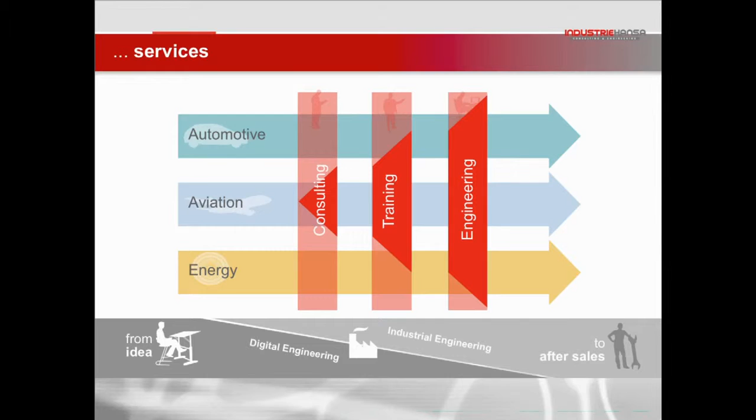IndustrieHansa is a big German company focusing mainly on engineering services across the automotive, aviation, energy, and so on. What's important is they've got some customers — they've existed for almost 25 years, so there's a lot of relationships already. There's something to start with as a basement. What's more important, there are almost 2,000 employees right now, all engineers.

That's an important part, because in that environment I was asked to build the styling and design department — that means creative people, artists, left brains versus right brains. So what we have here at IndustrieHansa, which didn't have any of these services in their portfolio before — it wasn't known for these services on the market, although we had something like 80 people working in the technical surfacing department, which is somehow related to the design and styling departments as well.

So how do you introduce a brand new team to a market that's really picky? How do you do it without going through individual portfolios and listing the whole team as a set of individuals? No, it doesn't work like that. So we wanted something that would put everything under one roof and introduce the team itself. We found the best way to do it is to introduce the skills and the mindset inside the studio through the process, through the story of how we actually create things.

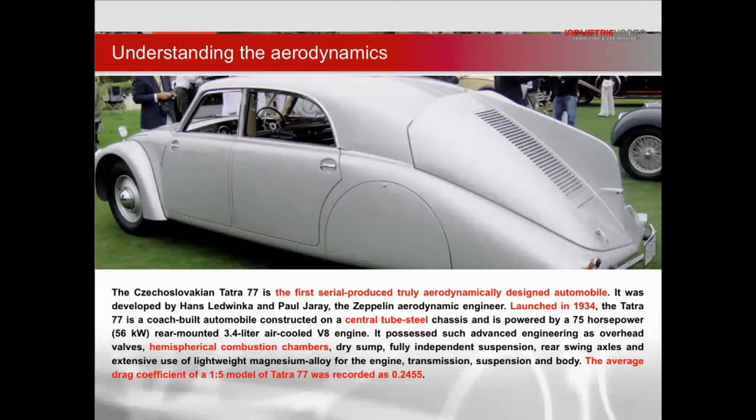So we went through this little car - that's the first one, the Tatra 77. It's the first serial-produced, truly aerodynamic car. This is the drag coefficient - only a few cars right now have that coefficient. It was 1934.

By the way, something for my American friends - it's got a Hemi, 8-cylinder. So this was one of the first truly aerodynamic cars mass produced.

Really interesting, really cool car, a lot of technological parts - and then I'm just losing my ability to speak English. Sorry, I'm not American, not English, you can hear that. I'm here for two weeks and I'm slowly losing my ability to speak English. So the technology was really advanced.

By the way, there are two important names here: Paul Jaray, the Zeppelin engineer, and Hans Ledwinka, the famous Porsche and Beetle designer, engineer. So this car was built and designed in Czech Republic, Czechoslovakia, in 1934. That's a brilliant heritage - by the way, Jay Leno has one of those cars in his garage as well.

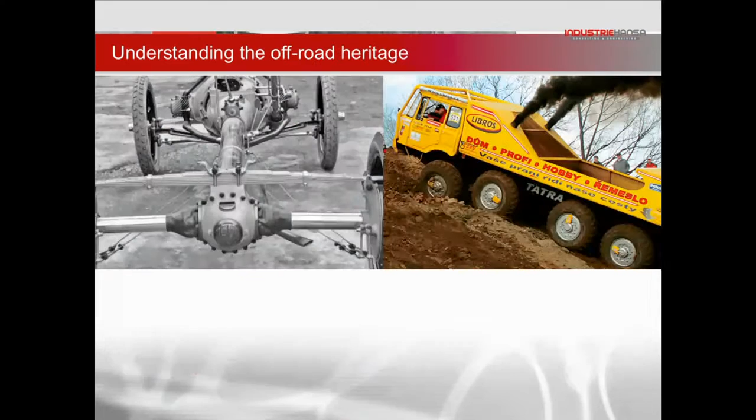What else? We have that tube frame, the central backbone spine of the whole car, that allows it to move over difficult terrain like the example on the other side. Interestingly, even the car I was showing before is based on this tubular frame. So it combined off-road abilities with the phenomenal efficiency based on the aerodynamic solution - so we have that off-road heritage, and that was one bit unfamous.

From the 50s, 60s, and 70s, those were the cars used by secret police in the former communist bloc. So whenever you saw that car on the road, parking in front of your house, you knew you were in deep trouble. But it was the synonym of luxury in those days. It still is, by the way.

If we have time later on, I can show you a brilliant movie of how they drive it over the mountains. In one day they're changing from snow to mud, fantastic, brilliant. Oh, it's on YouTube as well.

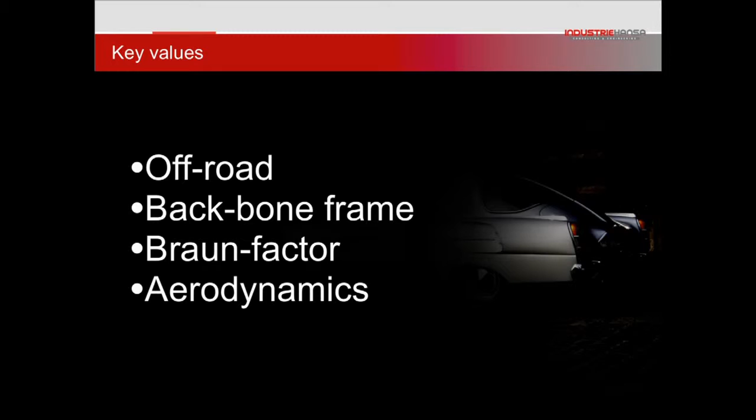So this is the part everyone likes. I was attending one of the classes yesterday, called Rockets, Robots, and Cars. Fantastic show, fantastic presentation. I love how this designer was using real elements and putting them in a different context, painting over.

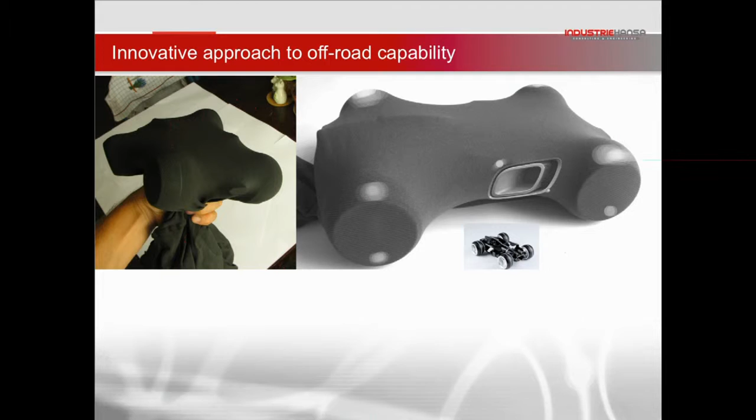And that's exactly what we're doing as well. This is Daniel Simon's Tron vehicle, and one of my designers has just stolen one of the shirts of her wife and wrapped it over. We find interesting forms combined with off-road functionality. So in one image, one little example, we've got a combination of the aerodynamic shape and the off-road capability. I like that.

We started sketching. This is something we always enjoy. We were playing with a lot of ideas. By the way, these sketches on the right side are the iPad sketches. I love the symmetry, I'm using the little Pogo sketch app. Today I just learned that there's a Pogo with pressure sensitivity available — I need to get it.

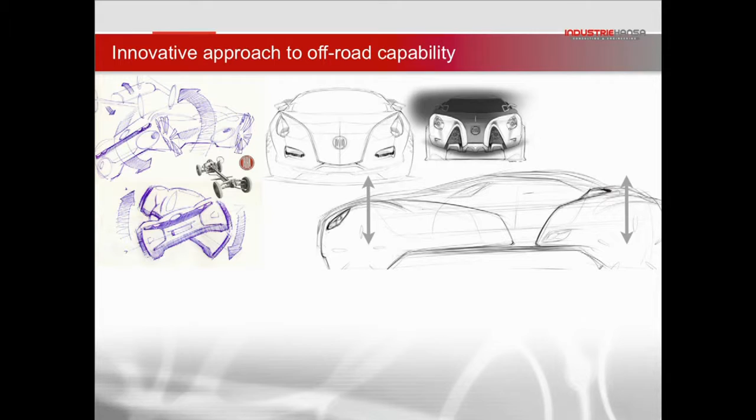Analog stuff, producing hundreds of sketches. I just don't want to spend too much time on it because this is the Autodesk event and we need to focus on digital tools sooner or later.

So we started with some side views. These are really important because they help you set the proportions, and also they help you focus on the goals. And the purity, that Braun factor in the form language, was something I was considering one of the most important things. This is one of the initial sketches one of my designers did.

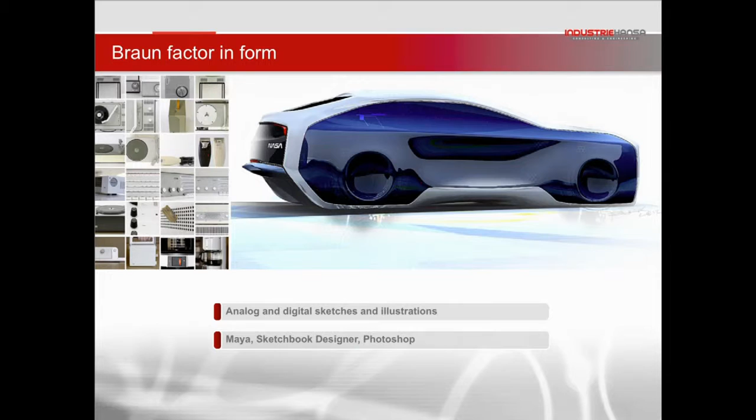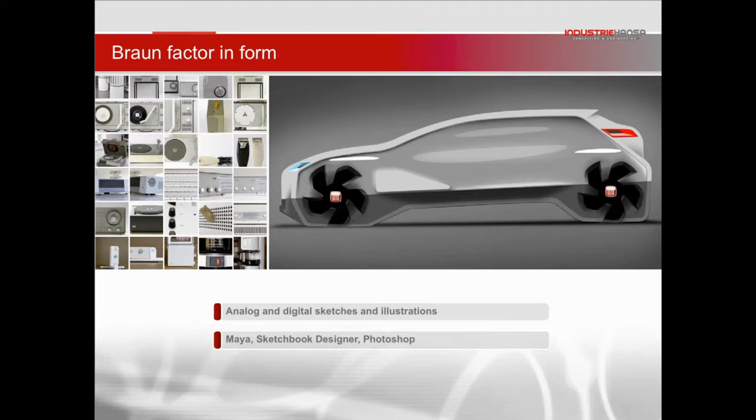There was another one using a little bit more soft forms. As you can see, I was really trying to get my team not to make something too realistic in the beginning, just to have a lot of freedom expressing the form of the car within the SUV type of segment, without worrying about wheels or whatever. Just express it as a sculpture. Express yourself with the sculpture. There's another one, a little bit soft form.

And then we got the third designer in the house. He jumped in after 2 months and brought this idea. Interesting, but where the hell is that Braun factor? Crazy, but there were some ideas he came with that were quite viable, and we worked with them later on. Maya, Sketchbook Designer — all those things we really like to use in those phases.

As well as polygonal modeling - I'm a really big Alias fan, but even working with Alias for maybe the last 15 years, I found the NURBS core really limiting from the start. Because suddenly if you find yourself asking how would I do that with the curves of the surface transition, it limits you.

That's why I really enjoy playing with Maya and 3ds Max in terms of polygonal or subdivision modeling, because that gives you a chance to play with forms and proportions even better than with clay. What's beautiful is you can spit out the STL model and get overnight a quarter scale or small scale model just to judge the proportions, shapes, and volumes.

The beauty of polygon modeling is in its core. You can choose Maya or 3ds Max and you can't go wrong, because the polygonal modeling is the same everywhere. If you feel better with Maya, use Maya. If you like 3ds Max, you'll be able to do exactly the same thing, maybe with one or two mouse clicks more or less. But it's your choice, and that's the beauty - we can use that freedom of tool choice.

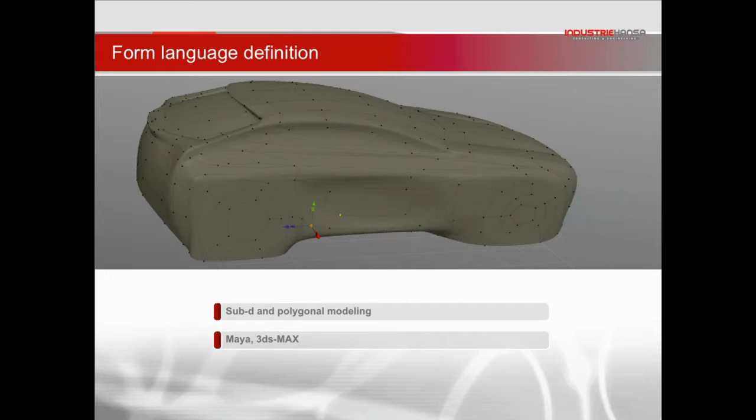Mudbox, very cool stuff in combination with Maya and 3ds Max. Once you start building your models using the subdivision modeling technique, you can easily bring that data into Mudbox, because the topology of the polygons is so simple that you can play with forms like sills and shoulder lines the way you really like, kind of mimicking the analog approach - the same thing you'd do with clay, but in a less expensive way. So this is a really big money saver.

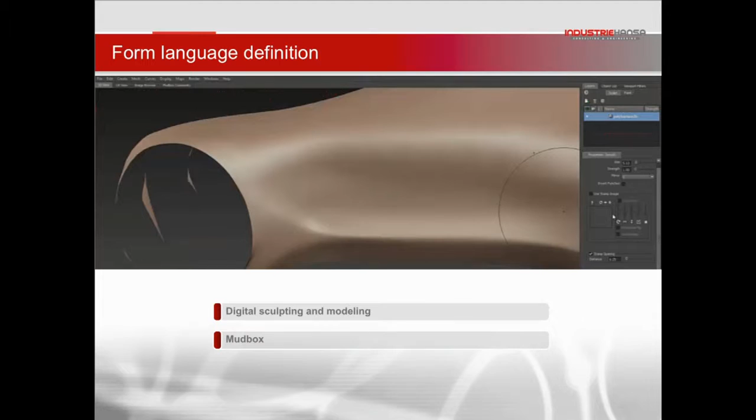All right, Alias again on the scene. I was trying to force the guys to express themselves in the form of 3D tape drawing. Does anyone know what tape drawing is? Yeah, there are a couple of people. Cool. For the others, tape drawing is basically a drawing of a car in 1:1 scale, in most cases using black Scotch tapes put on a white big board with a 100mm grid.

This is the first moment where you can see the real size and real proportions of the car. The human brain really cheats you - when you look at the screen, you will never get the size and proportions of the car right until...

...you put it on the Powerwall or make the tape drawing. On the other side, computers give you the advantage to build a 3D tape drawing, something you can't do on the wall or on paper. By the way, this technique is nothing new, just computers helped us be a little faster. The old Italian masters used something called piano di forma, which was basically a side view, top view, and front view all linked together in 1:1. And this is something you can do in a computer.

So one of my guys, a really good Alias modeler and designer, instantly jumped into Alias to build the model. I forced him to forget about the surfaces - if you want to present me Alias work, don't present the surfaces, I want you to go through a wireframe. And he built that image.

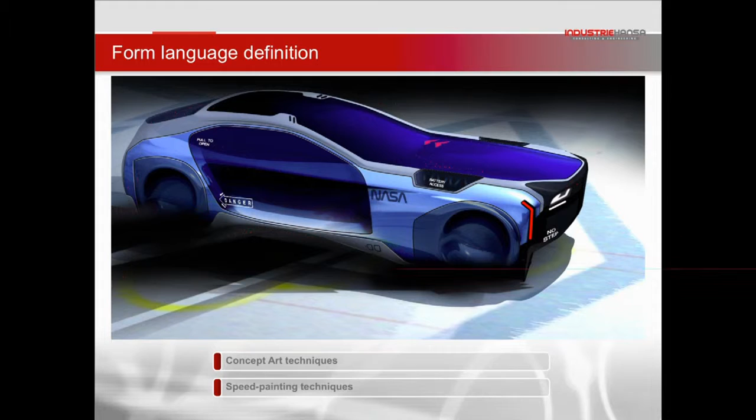Of course, I did that little sketch when the Mars rover Curiosity landed on Mars, and I was so excited that I was putting the NASA logo everywhere. If that happened a couple weeks later, it would be a Red Bull sign and Felix Baumgartner on the door.

Yeah, the other guy in my team is really keen on heavy machinery and trains, so he did this little speed paint. I quite like those things - they're hanging right now in our studio.

Backbone frame. This whole concept, because we wanted to put it in a 21st century context, we decided to use electric engines. We ended up with not 4 engines, but 6 engines. Plus there are 4 hub engines.

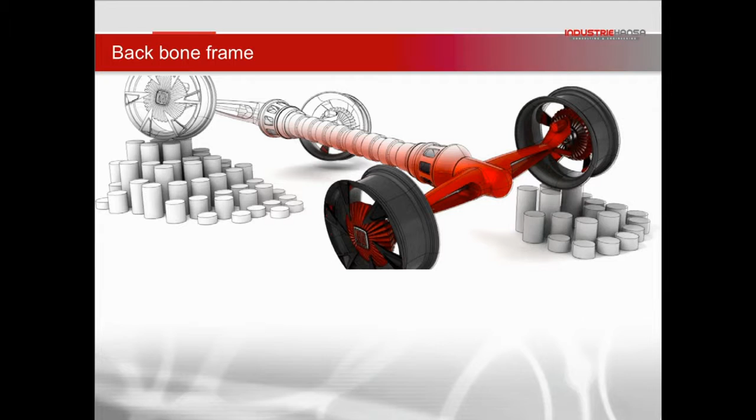Plus those arms are made out of a material called electropolymer, which changes its flexibility with the presence of electric current, so it behaves as a suspension without needing something complex mechanically through the frame. We put that backbone frame into that sculpture just to illustrate how that would work together, and I think it's a pretty appealing image, even without saying it's going to be a car.

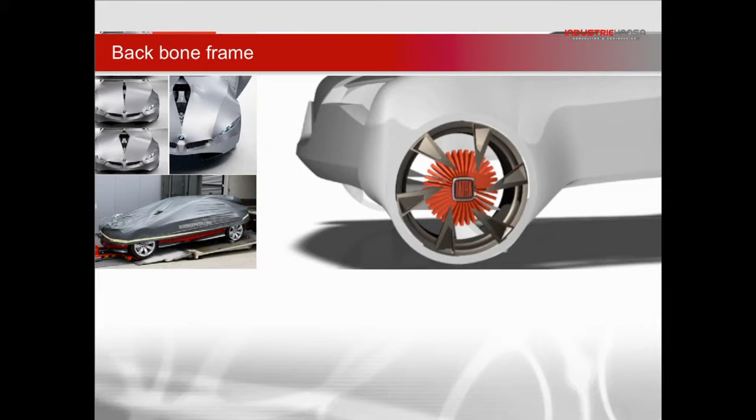When you go to the theater, you wear the long sleeve. If you go off-road, you wrap your sleeve up. That's exactly how that worked. One of the guys did a quick animation in Alias just to illustrate how that could work, because one of the biggest issues with SUV design versus aerodynamics is the large wheel openings, where the wheel travels when the car moves off-road. But on the highway, it catches a lot of air and creates problems in terms of aerodynamics.

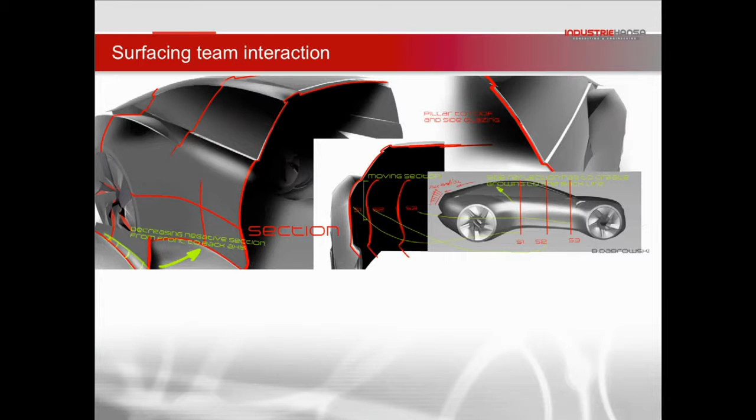A couple more sketches, a couple more side views. Then, based on the Maya models, we started to communicate the idea with the Alias modelers. We got some ICEM guys as well. I just cannot hide that. And that's how we started.

One of my guys got so impressed about this whole project that he did another movie. I'm going to show it in a minute.

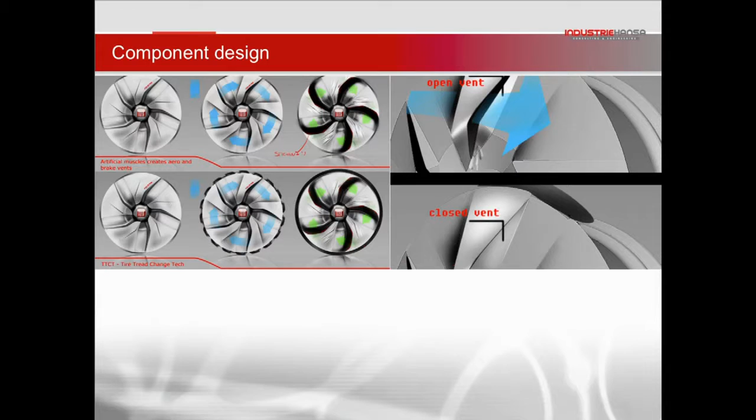I want to spend half a second on the detail of the rims, playing with the idea that ventilation, the cooling of the hub engines, could be restricting the aerodynamic factor as well. So we decided that even the rims will be a dynamic component that changes over speed and over the momentary situation, like a city versus highway mode. There are little vents that open when you don't need the aerodynamic restrictions, in order to cool down the engines.

It's quite nice how those designers' ideas, those creative designers, those artists, are influencing the engineering. We had a couple of engineers helping us implement those things, just so it wasn't only science fiction, and they were pretty excited about it. So we might get some of those things implemented in production quite early. There was another movie that one of my designers did.

The beauty of those images is that it doesn't take too long to do that.

Dramatic. I've said that the beauty of this movie making is that you get your Mac, you get your PC, and there's a movie maker, I don't know what the names are, with predefined templates. You just throw in the images, a couple of animations, it adds the music automatically, it guides you through the story, gives you a chance to put the titles where they should be, and suddenly you're doing the Hollywood stuff. I love that.

So that is the project I wanted to show you. This project was mostly a marketing project to illustrate, to sell the idea of the brand new design department. We set up a Facebook page called Concept Hansa, where you can see further development.

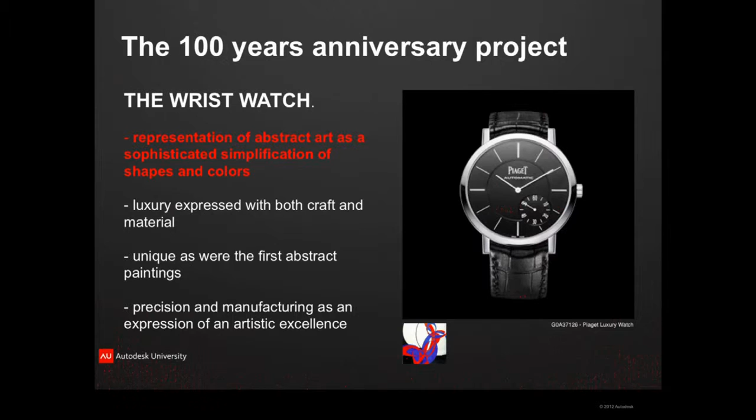There's of course a certain luxury associated with wristwatches generally. I don't like that skull in the middle, but as an example of craft, this is phenomenal. The treatment of the materials is just amazing.

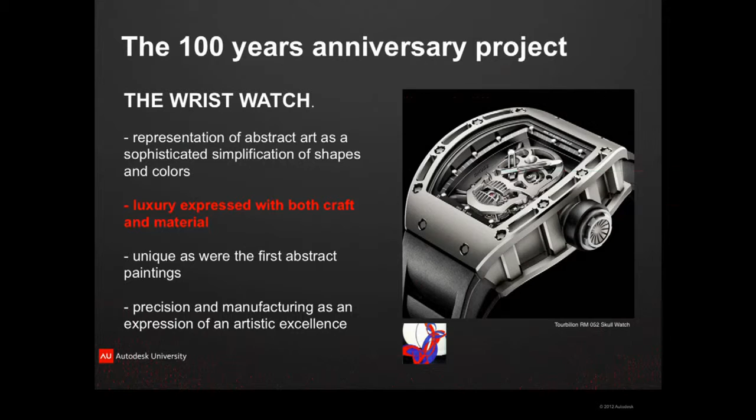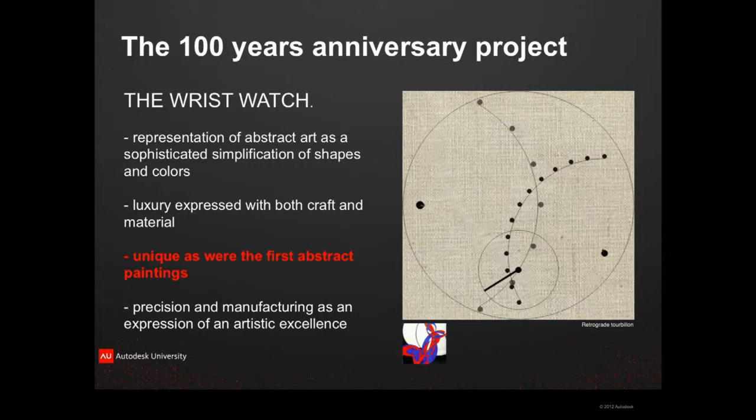We were quite lucky that those watchmakers had built a unique tourbillon which doesn't have a central axis for the hands, but actually has three separate axes. That gives you a different movement of those arms. I'm going to speak about it a little bit later. So that was a really unique possibility to interpret that old painting in the form of a product. And of course, the tourbillon itself is a state of the art combination of beautiful engineering and art.

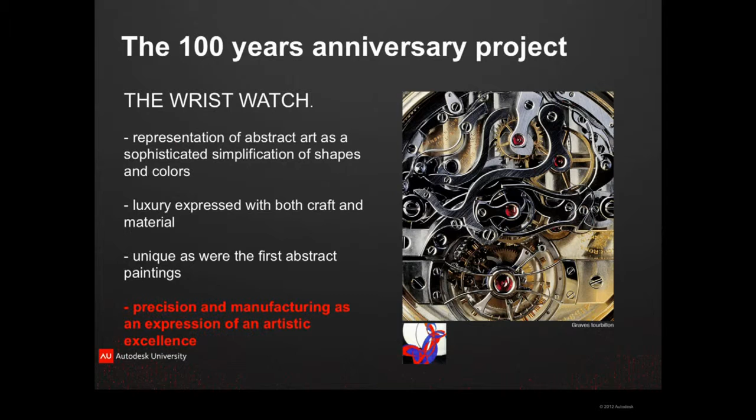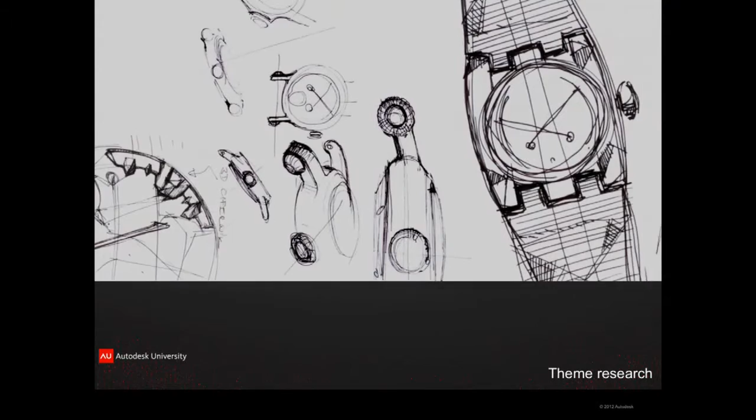So what we did, we started to do some sketching. It was a very limited team, basically myself doing the concept research and theme definition, and one designer/alias modeler who was producing a lot of models later, because communication with the manufacturer wasn't that easy. What I want to speak about is how we went through the whole process, starting with sketching something really abstract, just trying to interpret this whole theme in a way of decoration, which was not the right approach. I was trying to play with the arms, with the hands themselves, displaying how they're different from normal wristwatches, but it wasn't working.

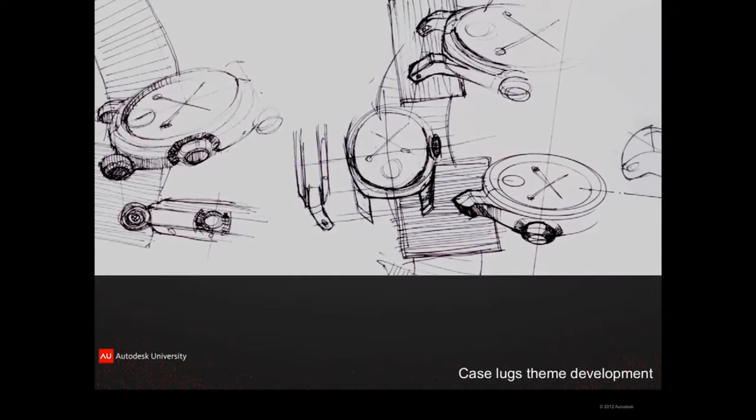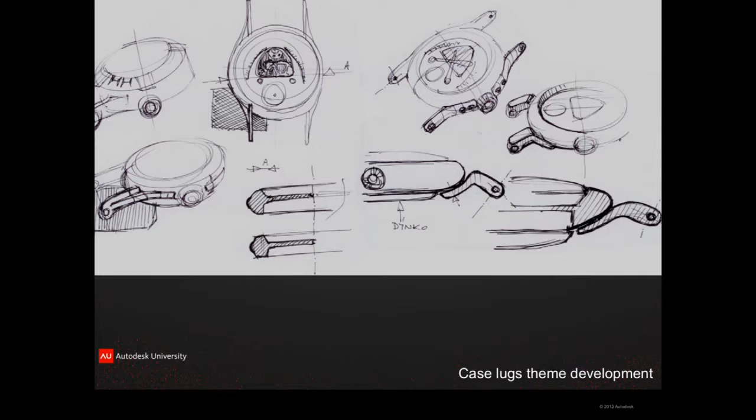The more we were thinking about the whole thing - by the way, most of the sketches were done directly when communicating with the watchmakers, one-to-one meetings and sketching all the time - we found out that the case lugs are probably one of the most important parts of the whole design. We were looking for a way to differentiate from the rest of the market, and we found that not having those case lugs as part of the body, as part of the case, is probably the only way to draw the attention of the potential buyer or watch lover to that watch. That could make them unique.

There were a couple of ideas we were playing with.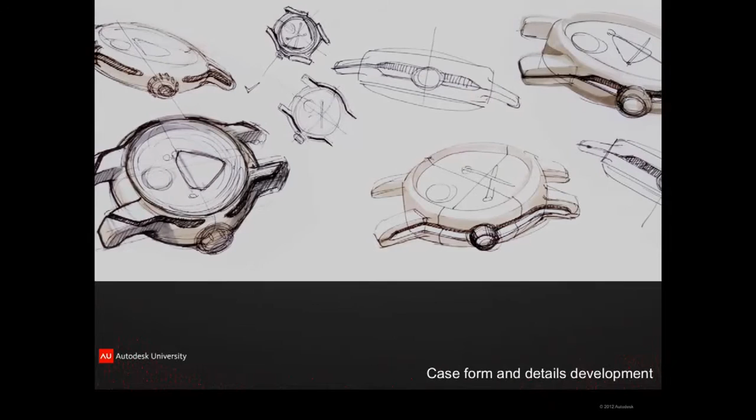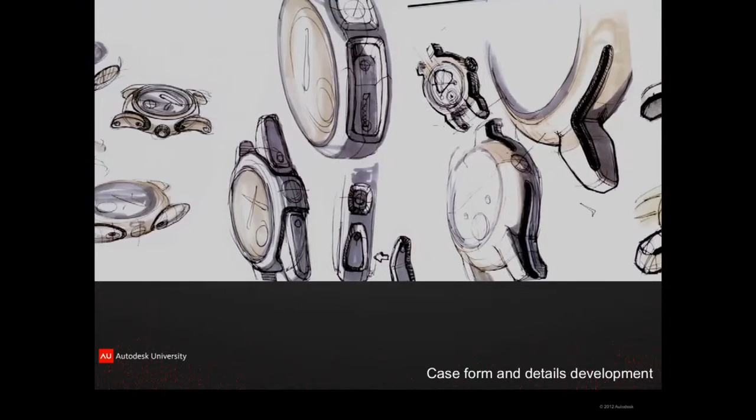We're playing also with the idea of some decorations, grooves, cuts going through the body, but we have discarded them because that would be against the simplification of the forms, one of the key attributes we have set as goals in the initial phase of the project.

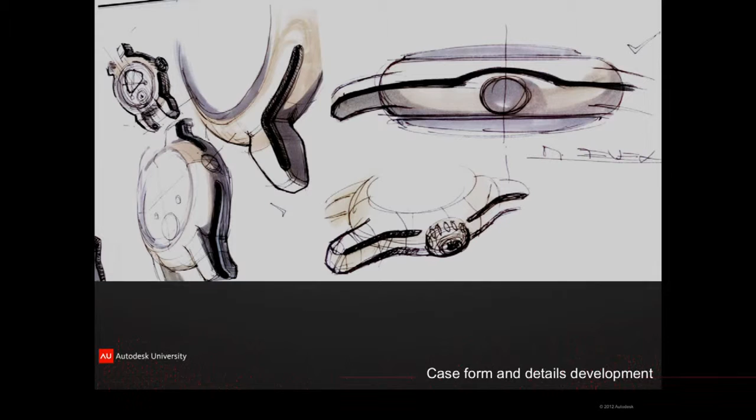But then I did this little sketch on the top right, and the watchmaker was really impressed about the simplicity of the shape, a really round shape. This is nothing special about it, but later on you will see how we have translated it in the real product.

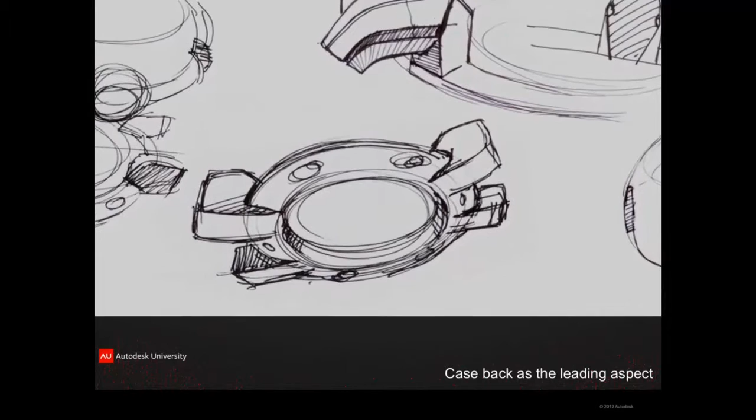So speaking of the case lugs, we decided we will listen to the manufacturing guys, because although we are using some NC machinery, this is white gold, so it's pretty soft. You can't do too much when you mill those pieces. But we decided that we can actually mount the case lugs to the case back in order to separate it visually from the case itself, to create very sharp angles even in the inner radiuses of the case.

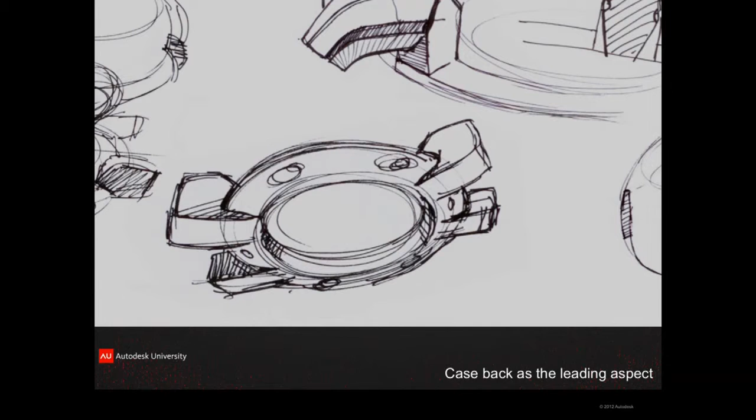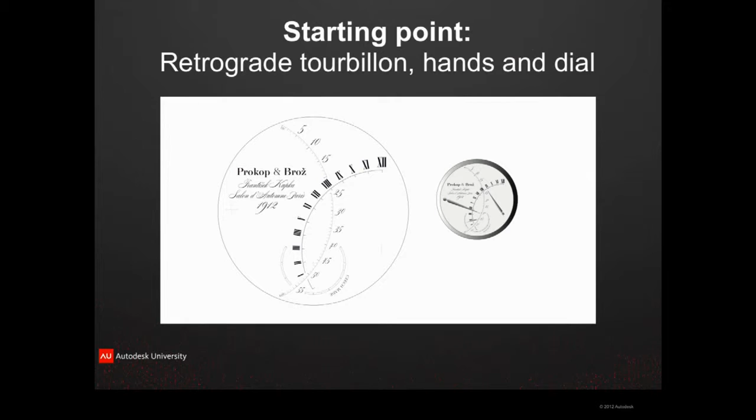This is, by the way, the dial. That's how it looks. I didn't do the dial because the watchmakers have their own graphic designer. I couldn't influence that. To me it's a little bit too Art Deco, but fair enough, that's the way it's done.

So now, Maya again in the game. One afternoon, just quickly forming up basic volumes, putting the texture of the dials, trying to play with the idea of the separated case lugs, and that was the result - quite convincing, photorealistic imagery.

Thank you. I'm just...

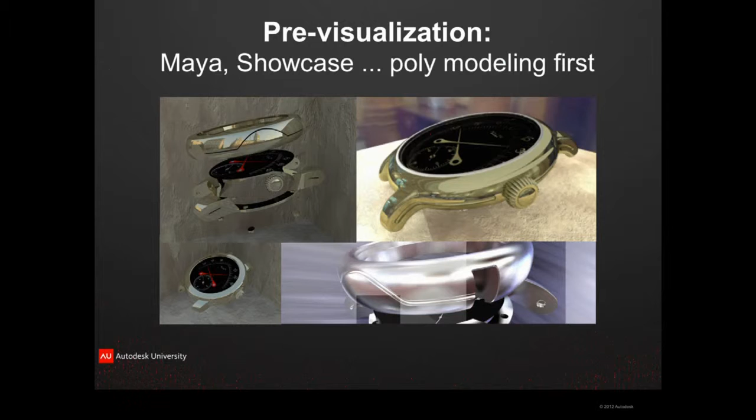So we started with the Maya models pretty quickly just to communicate the idea, but because we had to bring those plans into production as quick as possible, we had to give them some data, and the watchmakers were working with Rhino. Interestingly, the Maya and Alias transition was so seamless.

By the way, I just found out there's a plugin for Alias that exports directly the Rhino data. Just go to the internet, Google it, because it's phenomenal, it's great. It helps very well, no information loss.

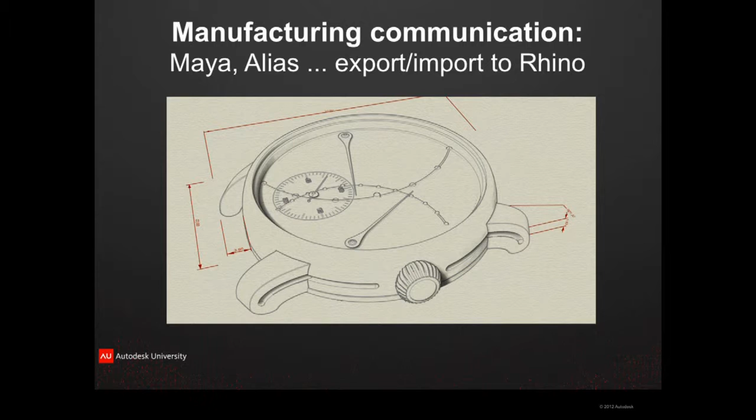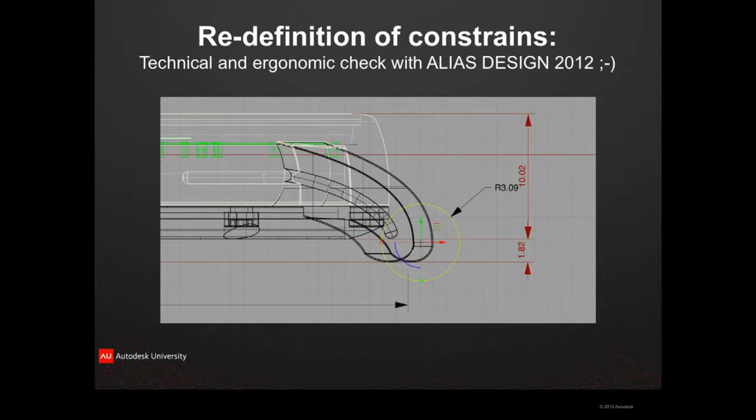I've mentioned earlier, I'm a big lover of Alias. Most of the engineering communication and the manufacturing communication happen at the level of Alias design - the cheapest product from the whole Alias family. Without that, we wouldn't probably be able to go that far within that short time frame.

The communication was really difficult because we had to make sure that the armband - you call it like that? Yeah? How do you call it? Wristband - will fit in between the lugs.

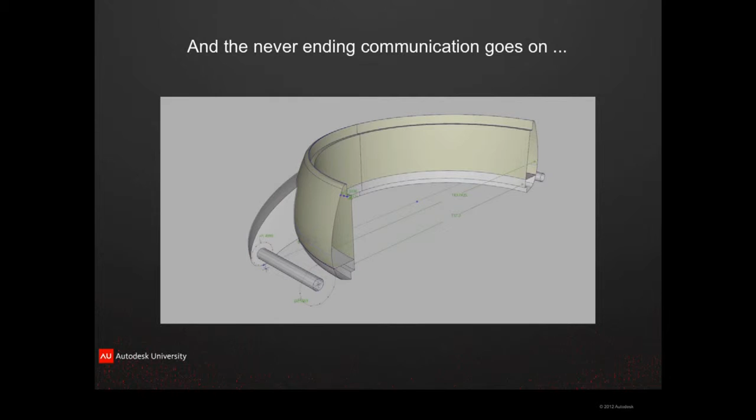We will have enough space to wrap the leather around it, because even the wristband will be handmade. So we had to make sure there will be enough material around the glass, around the lenses here, because there will be a minimalistic sealing around it. And remember, this is going to be white gold, so there's just 1 millimeter thickness at the peak of that case - quite challenging technologically.

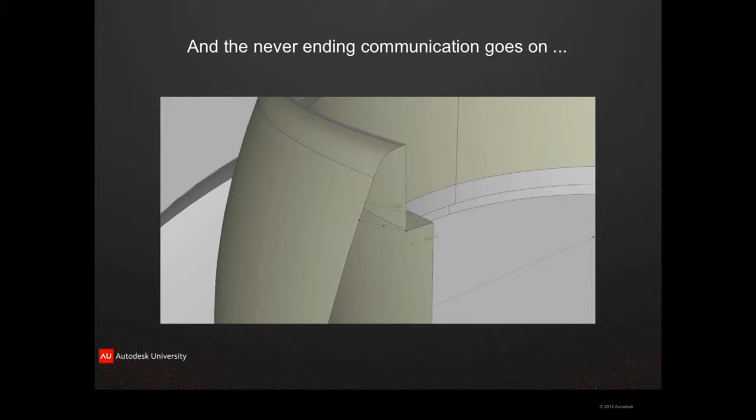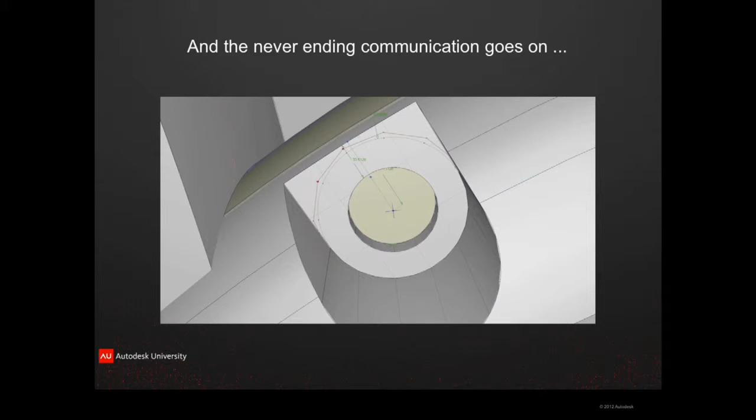Again, the same situation about the wristband. The little holes for the screws down there - I wasn't happy, but there was a request. Instead of drilling the holes and creating an elliptical hole, they preferred a milled out hole, coming with the tool from the side and removing the material, getting a kind of rectangular part outside of the case back. I don't like it, but we have changed it, by the way.

So this is one of the initial concepts. We gave up in the end the groove, the cut, because we found out that the case itself is so minimalistic and so pure in its form that it brings that required value of luxury and a premium feel. As you can see on those case lugs, we got a really sharp corner, and this is something we wouldn't be able to produce, and no one would be able to produce, if you kept the case lugs coming straight out of the main body of the wristwatch.

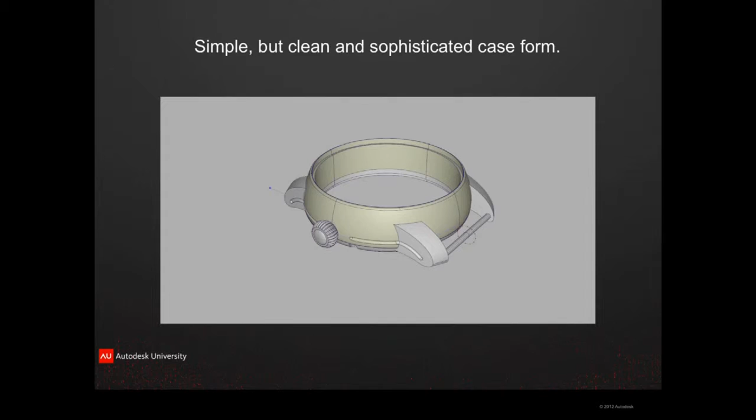A few more shots - that's the case back, how it will look manufactured. And these are the final visualizations. So what is important here?

I cannot show you the final stuff because this is going to be released in 2 days. I didn't have approval for that. But it will be released in 2 days, and there will be some kind of marketing event happening around it, so I'm pretty sure you won't miss it wherever in the world you are.

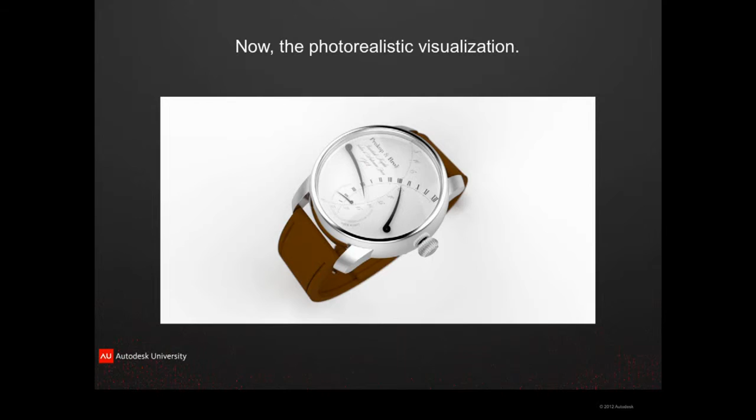I'm pretty proud of that, because although there will be only 10 pieces, this whole project laid the foundation for a more massive series of products for the future. The philosophy that came from the manufacturing initially influenced the styling solution. The case lugs mounted to the case back became a key attribute of the whole new production line of wristwatches, which is pretty unique.

Again, quite innovative. I'm going to finish with this: 30th of November 2012, 10 pieces, $50,000. Unfortunately, all sold, if you're interested.

What? No. You know what? I love wristwatches. I've got a couple of the wristwatches I have designed myself, but none of them goes, it's not even far from that level. Just remember the first slide I gave about myself, the billionaire? It's one of the items which is not true.

All right, the last example. I think I just don't want to... it's like 15 minutes, it's perfect timing. Unlimited creativity, I like this one. I'll go quickly through those things because this should be a kind of cherry on the cake and should make you laugh.

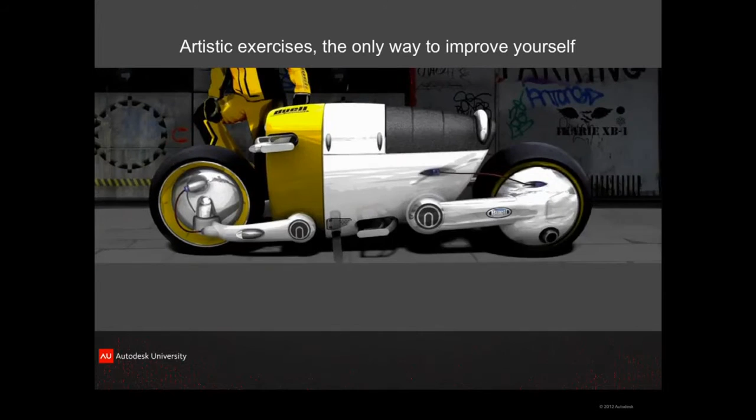This is something I really love to do, and most of you who know my work are not surprised that I'm showing this again. I'm also doing this stuff. A couple of people asked me if I'm going to give away a calendar again this year. No, I don't have any more calendars, sorry, I was working as a director this year. But you probably know some of those images. Specifically this one, which made me proud yesterday during the keynote - 9,000 people have seen my image.

Cool. But I did this one as well - it was kind of two guys racing something like I would call a redneck Segway.

A friend of mine used to be a designer at Mercedes; right now he's one of the chief designers at Volkswagen in Germany, in Wolfsburg. He was like, 'Hey Mike, this is like all your science fiction stuff - you don't need to build it, you just can play in it.' You know that, the rednecks? You won't do that. I will. So I did - that was my reaction.

But of course I'm not a mechanical engineer, I'm an artist. So I got some wise people around me and asked them for advice. My father, 40 years in the industry, his reaction...

A friend and colleague of mine from the UK said, 'You've got too much free time.' One of my friends from our motocross gang was like, 'Why would you do that? No one else is doing that.' Why - they are pretty down to earth people. And I love the last one - I've got a friend who's really in a top management position, that's his quote.

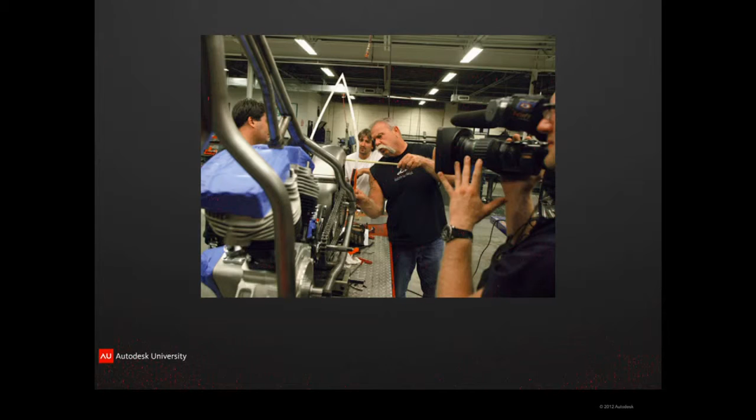All right, but I have to say, I was able to find very good advice. So, thank you, TV. I'm not a big fan of this show, but I love the way they approach building anything - just sharpen your saw, chop it, weld it, and make the bike. So with no engineering, with no CAD data, we started to build something.

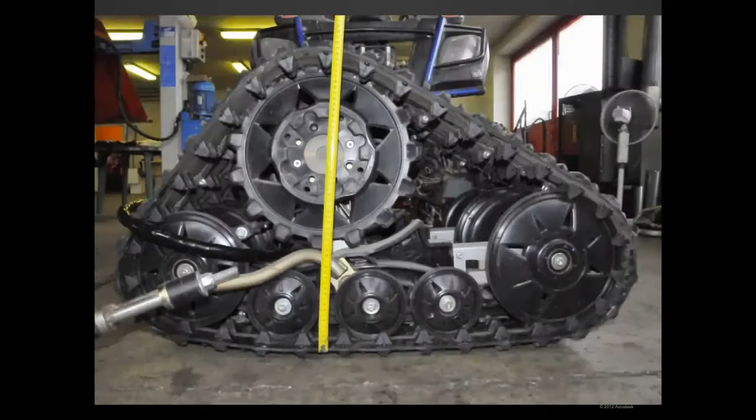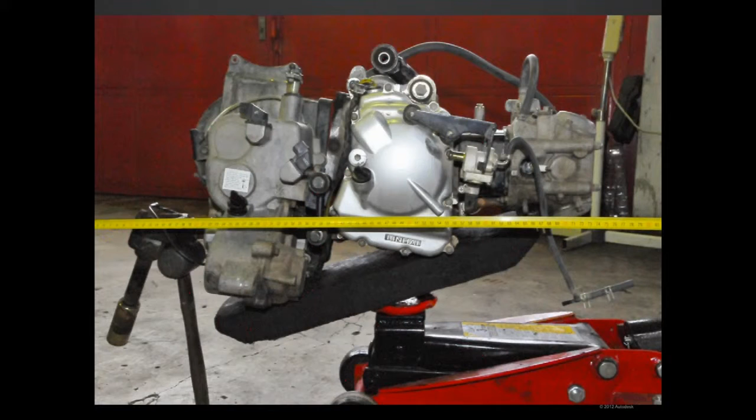I got a very cheap ATV. These are the TJD tracks, you can get them anywhere around the world, and you can mount them on the ATV. That's the Chinese version of the Honda engine with the CVT built-in, 280cc. It's like $900 for the whole ATV, the engine and everything.

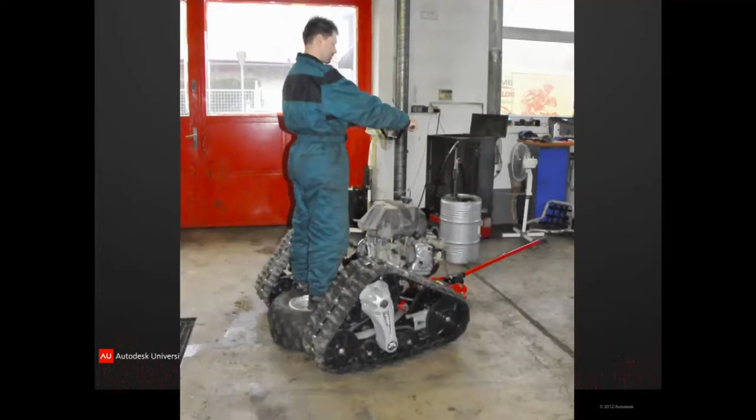We measured the hard points where to mount the engine, measured the important parts, did some ergonomical research, and started to build it. It's really in the way of chop, weld, and experiment.

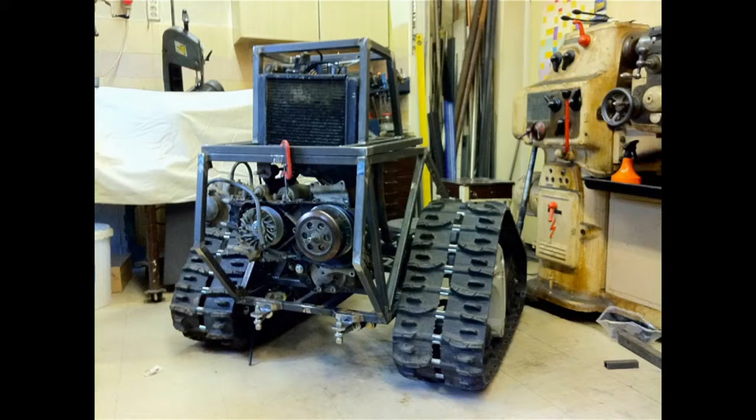No, I will not lie - there were some drawings, some sketches made for the process. We wouldn't be able to do it otherwise. There's one of the initial models - still looks quite Mad Max.

Here goes one free advice - I was quite lucky on the supporting team. I got a guy who's really intelligent, a mechanical engineer but a welder as well, so really good in crafts and really technical-minded. I was working for Autodesk at the time, so it was really a weekend's project.

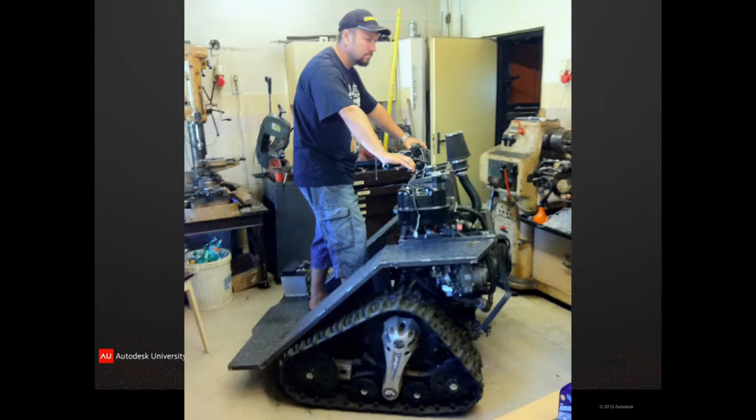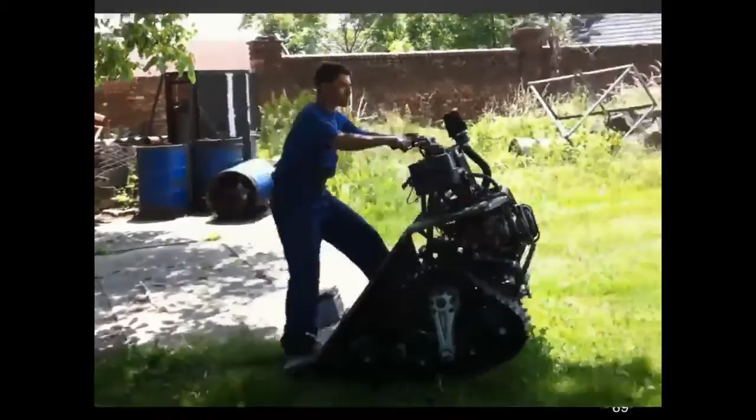It took more than weekends then. But I was 2 weeks away, so I left him alone. That's what he did - like, I had to put something to protect us, look at my face. We needed to chop all that metallic stuff because it's like 50 kilos more, just get rid of it. He said he spent the last 2 weeks putting it all together, and it works, it moves. So I said, show me. It really didn't move well.

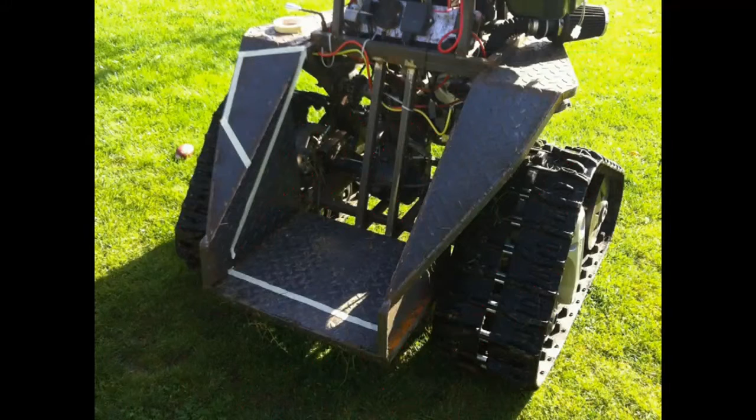This is a good example of a tape drawing, how to chop out the pieces. We started quite dramatically and ended up with even more dramatic chop outs, and suddenly the whole thing became much more controllable. We also changed the weight distribution, but the whole engine was still completely wrong. It was really an experiment, a proof of concept, but it kind of worked.

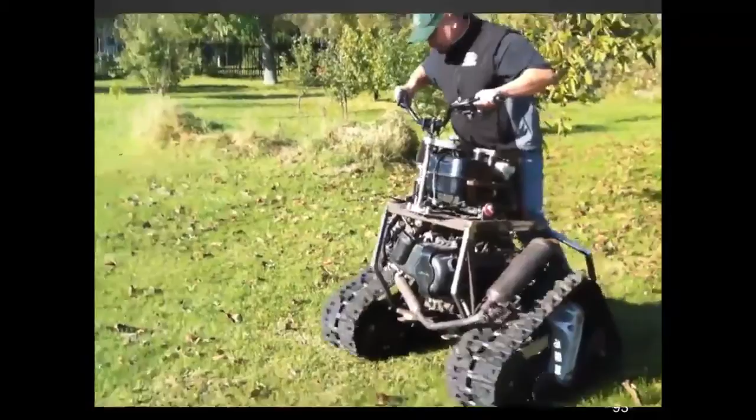As you can see, this thing can do about 50 kilometers per hour, and suddenly you have to deal with the momentum of your body. It reminds me of the feeling of really riding a Segway or snowboard, because you really have to move your body to balance the whole thing. But it's interestingly drivable, and it's fun to drive.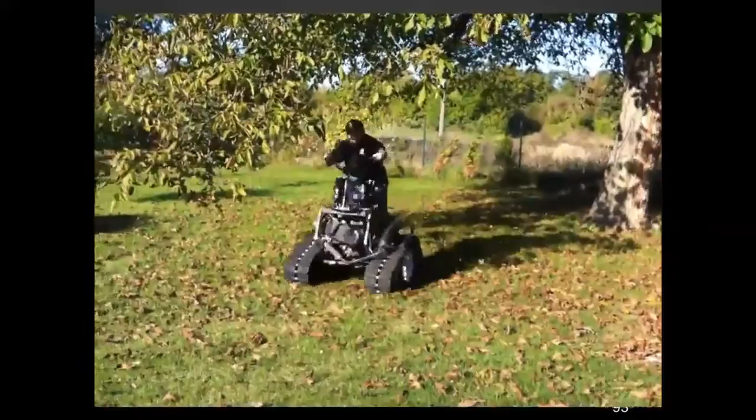So I was posting those little videos, trying to make the wheelie, and I had a discussion with a friend of mine who has the factory layout booth down there, and it was like, hold my beer, I'll show you. There's a little bit of that attitude, and then that's nothing.

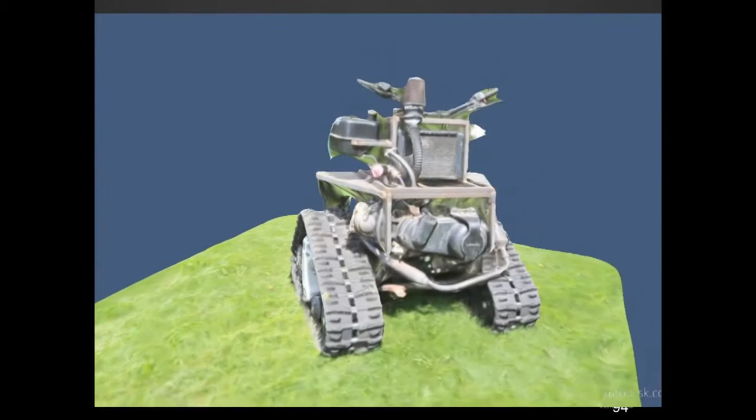Come on, let's go to another slide. So I used photogrammetry to make a little scan of the data. It went very well—we got the proportions inside the computer, including textures, and it's kind of fun.

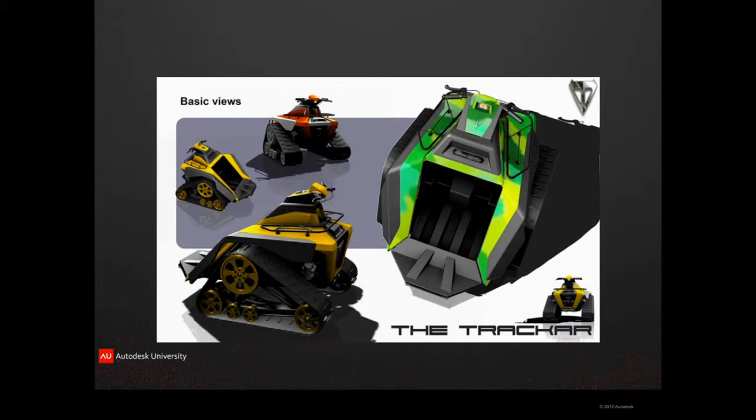Now let's go to more serious stuff, because when I was posting those movies, that was really just for fun. It suddenly attracted people interested in building it. Meanwhile, I got a patent for it, because no one else is building such a vehicle.

Through my research, I found out there's a specific space for this, at rescue squads or in flooded areas, because the whole thing is designed so that it can wade through 80 centimeters of depth. That's pretty impressive for such a vehicle.

With devices like that little trailer, or something for snow, you can transport people who are injured or unable to move from places where it's difficult to reach with an ATV, difficult with a snowmobile, difficult with a large truck, and probably impossible to walk to alone because the item you need to carry is too heavy. So suddenly there's a real space for such a vehicle.

So from that kind of experiment, joke, provocation, it suddenly becomes a real product, a real project, with real interest from investors. I didn't expect it, by the way.

Interestingly, because we were playing with one of the models I'm not showing, with electronic steering, we found a way to chain those vehicles behind each other and let them drive automatically in sequence. So you can have one driver escorting 5 or 6 other devices to a place where no one else wants to go.

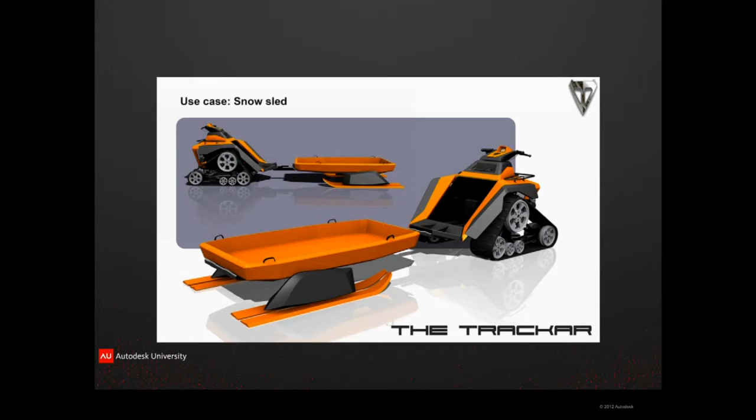Of course, winter is coming—that's quite important right now. Not here in Las Vegas, of course.

So I've started to communicate those ideas. There's a little interest, but it's interesting—once it comes to serious mass production, there are doubts. How many pieces, and what's the market? It's like a premium product.

Then I had an interesting discussion with a Chinese investor—a phenomenal gentleman, very intelligent, with phenomenal knowledge from art history. He's about 45 years old and just works for the sake of working; he doesn't need to work.

We were discussing the possibilities, and I mentioned it could be a fantastic garden tool, towing plows and stuff like that. His answer was, 'We are not too much keen on gardening in China.' So, okay, that market is gone.

But interestingly, not too much into that kind of utility type of use.

They were more interested in the recreation type of use. That's quite interesting because he was giving me some analysis, demonstrating that whatever happens with the economy, there are a few items that never go down: entertainment and recreation, and alcohol, of course.

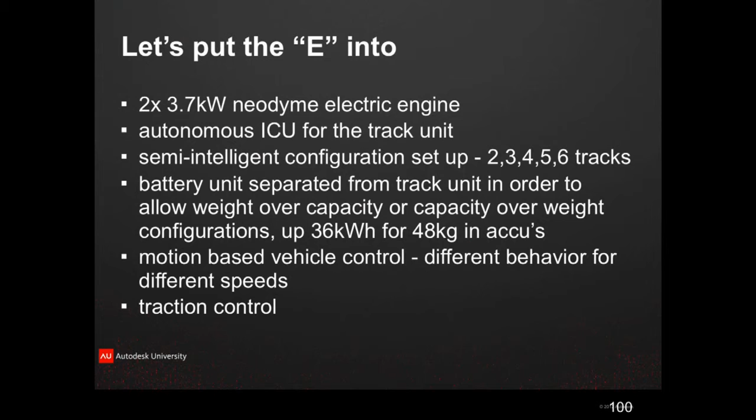So I started with some sketches, playing with the idea of a triangular shape for the tracks, where the whole track unit would be autonomous. I used the Sketchbook Designer here — by the way, the whole thing started with an Alias Plus Sketchbook Designer sketch, so that's why I'm speaking about it here.

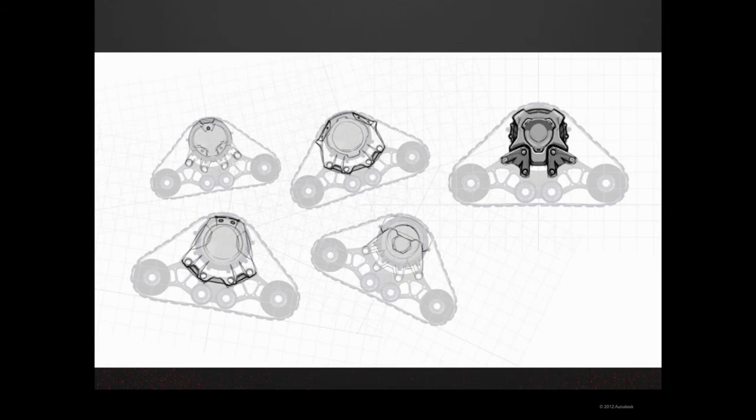And I've used Fusion extensively. Guys, I love that tool, because designing those little mechanical elements, the track parts, the inside, was so easy with Fusion. I would've spent too much time doing it in Alias — of course I could, but Fusion really helped me make those things quickly and put them back in Alias, in Showcase, to render the file and product.

So here we have the concept which is actually being built, but through our research we found out that we don't need to go to that triangular shape of the tracks. This is one of the engineering guys — he's using a very ancient version of AutoCAD, but he's cool with that, he doesn't need anything more.

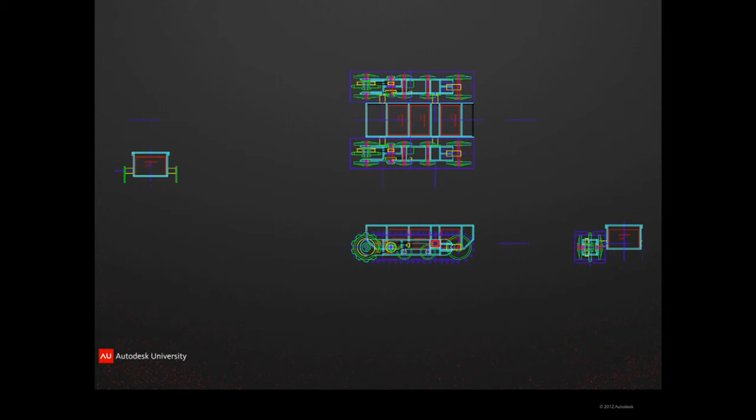We found out that we can have a really horizontal solution for the whole track, which allows us to put all the electronics, including the control unit, inside the track, so the batteries will be only outside. I did some sketches because this is really fresh, and this is the first test on the test bed with that 3.7 kilowatt engine. It's pretty impressive.